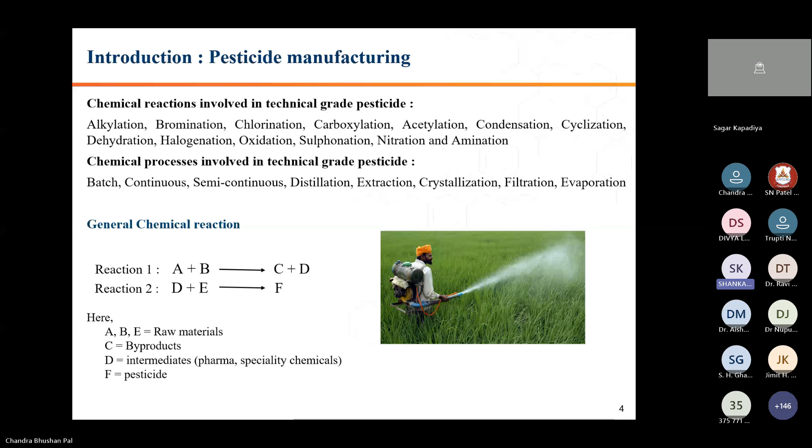Only there is a last reaction, which is the formation of pesticides - insecticide, herbicide, and all these things. The chemical processes involved are batch, continuous, and semi-continuous processes like distillation, extraction, crystallization, filtration, and evaporation. Same in the pesticide sector also. In general chemical reactions, you have already seen A plus B is equal to C plus D. In the pesticide sector, the last reaction is D plus E is equal to F, where F is the pesticide. Otherwise it's a normal reaction same as other chemical industries. Here C may be the byproduct, F is the pesticide, and D is an intermediate like in pharma, specialty chemicals, and all this.

Pesticide manufacturing - India is the fourth largest producer of agrochemicals after US, Japan, and China. Consumption of pesticide in India is 600 gram per hectare, while consumption of pesticide in other developed countries is 3,000, about 5 times more than Indian consumption.

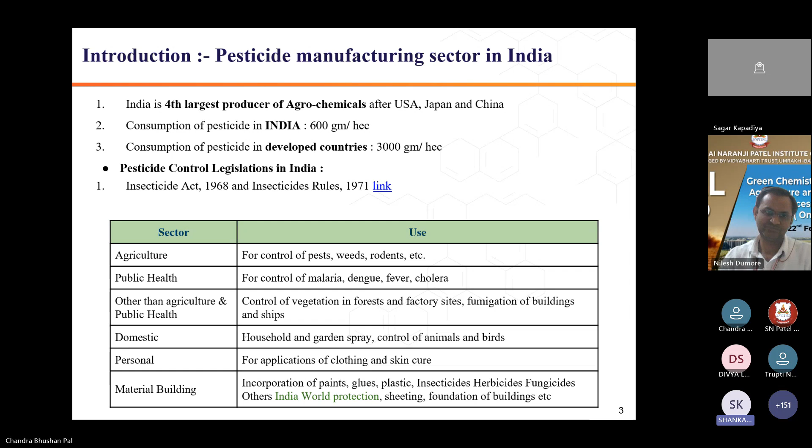The major act applicable to the pesticide sector is the Insecticide Act 1968 - we have given the link here also. Uses of pesticide are in agriculture, public health, and other than agriculture like wood preservation and storage, domestic, personal, and building construction also many times. So these are the uses of pesticides.

Type of pesticide is a very important part because depending on the type, the utilization is separated. If I see this, herbicide is a part of pesticide, but herbicide is different from insecticide. This kills the plants, either preventing or controlling them. Modern systemic herbicides are often used to control invasive plants, like grass, for destruction of grass and other invasive plant destruction.

Fungicide is a chemical compound that prevents or controls plant disease on contact. Fungicide forms a protective barrier on the outside of the plant to prevent disease from penetrating the tissues. Rodenticides are used to kill rodents. Insecticide is used to control or kill insects.

Carbamates are a group of insecticides that work by inhibiting the enzymes important for nervous system function, leading to paralysis and death of insects.

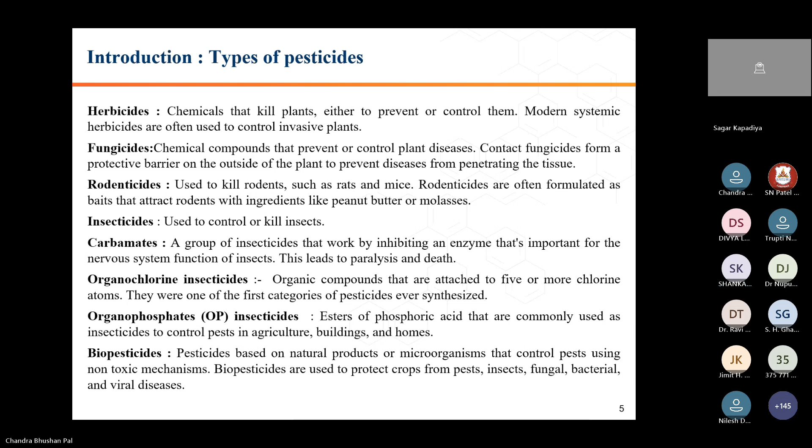Almost all chemical industries and sectors have similar water and wastewater management, maybe with slight differences. Otherwise, it's commonly needed across chemical industries. In the pesticide sector specifically, the only difference is that you have to destruct toxicity before sending to the effluent treatment plant.

Landfilling or incineration is the only additional criteria in the pesticide sector. Otherwise, the normal wastewater generation and treatment methodology is the same as in other sectors.

Water consumption in pesticide industries is mostly for cooling towers, boilers, and domestic processes, like other chemical industries. Water sources in Gujarat come from GIDC. If you're taking water from GIDC, then GIDC permission is required; if from borewell, then CGWA permissions are required.

Wastewater generated from processes—industrial means like cooling tower, boiler blow down, and sewage—cannot be used back into processes or discharged without treatment. This is the definition of wastewater. This wastewater gets treated in a dedicated wastewater treatment plant.

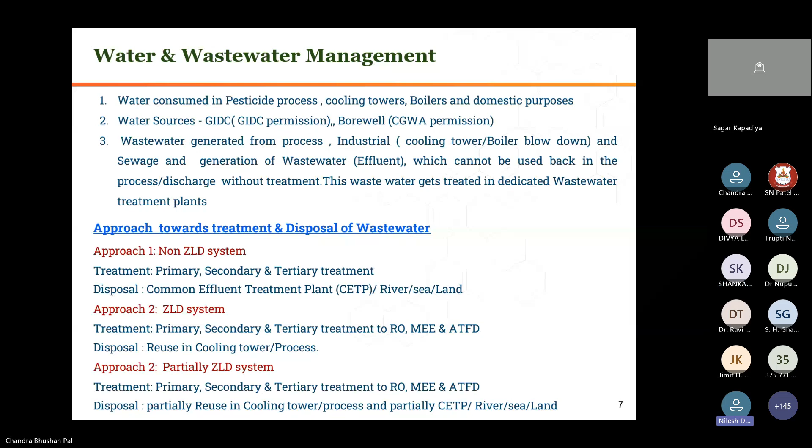So why is wastewater treatment important? Because if you don't treat your wastewater, there may be an impact on the environment as well as health.

To meet discharge norms of CETP, before discharging to CETP you need some treatment—only then can you achieve the CETP inlet norm. Similarly, deep sea discharge has a different norm, so to achieve those norms you have to treat your effluent.

Even for water recycling, you generally need some treatment—only then is it possible in a chemical industry to recycle your effluent back into processes as well as cooling towers.

Hence, before treatment, segregation is very, very important in a chemical industry. If you don't properly segregate, your effluent treatment plant will be disturbed, meaning not running properly, and a lot of issues will arise.

So always see in any chemical plant—even pesticide plants, pharma, all sectors—that segregation of effluent is a very, very basic requirement and a very important part.

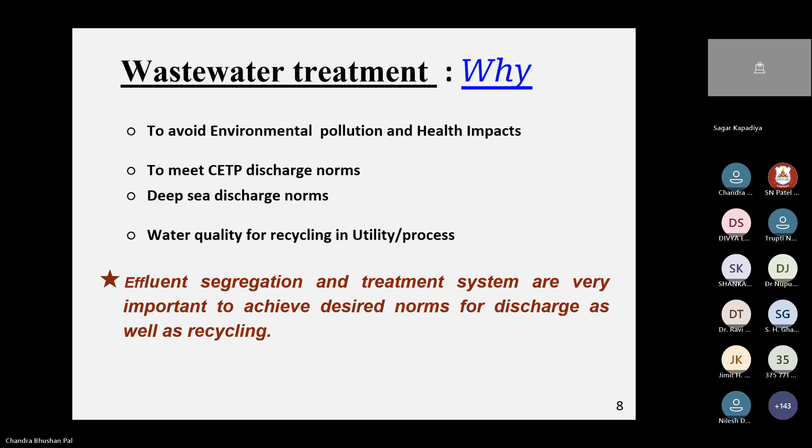Generally in a chemical industry, there is segregation like process effluent, industrial utility effluent coming from boilers and cooling towers, washing, cleaning and scrubbing, and domestic wastewater. This type of effluent segregation happens in chemical industries.

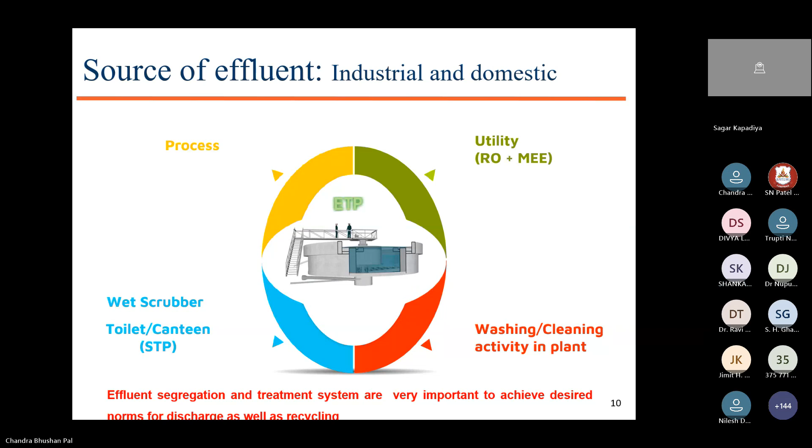By experience, I have given here how to segregate effluent in chemical industry. This is based on experience only - may not be written in some books, but by experience I have segregated effluent and we got good results for this. So if you see low COD and low TDS effluent - meaning below 5,000 COD and TDS below 10,000.

If BOD is more than 30%, you can take it directly into biological treatment. This is a thumb rule we have written here by experience. If BOD is less than 30% of COD, there may be slightly refractory COD there, so pre-treatment is needed like chlorination, ozonation, Fenton H2O2, followed by biological treatment.

Some effluent has nitrogen, like ammonical nitrogen, but low COD, low TDS effluent. Then pre-treatment is required for ammonia treatment because ammonia is toxic to biological treatment. You have to reduce ammonical nitrogen below 50 before biological treatment, then only will it run efficiently. Pre-treatment like H2O2, stripping, MAP system - all these are required to stabilize ammonia.

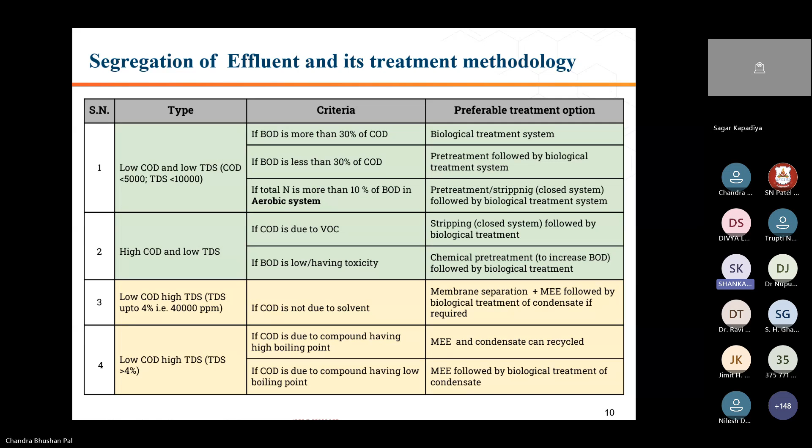Then high COD, high TDS: if COD is due to compound having low boiling point, stripper is required followed by MEE, or sometimes incineration, depending on the toxicity and other factors.

High COD, low TDS with high CV value: if CV is above 2500 and chloride is below 4%, then co-processing. Otherwise, that goes to incineration if toxicity is also there. Co-processing means sending your residue directly to cement industries, which utilize it as fuel, replacing coal.

Co-processing is a very good phenomenon, motivated by the Ministry of Environment and Forest, CPCB, as well as State Pollution Control Boards like GPCB. It's very important - your carbon footprint is reduced, fuel consumption is reduced, and it's very favorable for destroying your residue, because in combustion there are 3 T's that are very important: time, temperature, and turbulence. Let me compare incineration and cement industry.

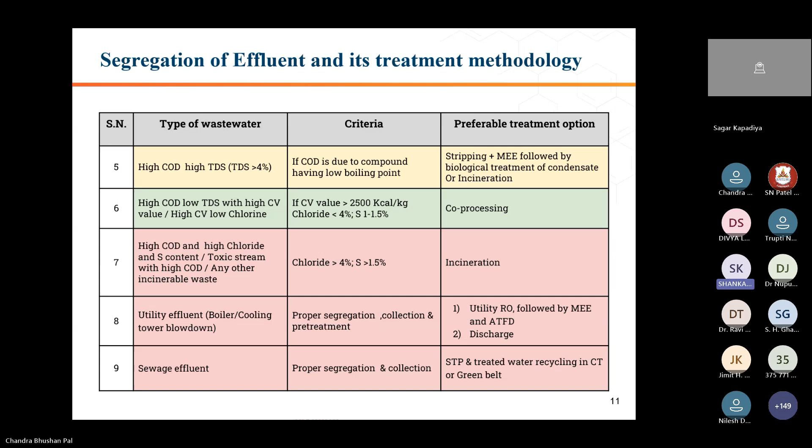Then if you have utility effluent like cooling tower blowdown, boiler blowdown, collect it and take it directly into the ETP, or some pre-treatment is required, and you can discharge it if there is marine or CETPs depending on your location. Sewage effluent you can take into the STP, and STP treated water you can utilize into green belt development or cooling tower after chlorination, because there is slightly bacterial content, so algae may generate if you don't chlorinate that compound.

So we see what is the effluent treatment plant. We have already segregated our water for biological treatment. Nothing is biological treatment, ETP plant depends on your quantity and quality of the effluent. You can select your type of ETP - activated sludge process, MBBR, MBR - depending on your trial run or treatability study. You can select your technology.

Correct. So here is primary treatment, biological secondary treatment, and tertiary treatment. If you see this preliminary treatment, this includes both physical unit operations and chemical unit operations. In preliminary treatment, you do physical separation as well as sometimes required chemicals like chlorination, ozonation, Fenton - all these chemicals are required.

In primary treatment, here also both physical as well as chemical, because you are removing SS by physical methodology by separation, and chemical reaction like coagulation and flocculation. Lime we are adding, there is a lot of acidity, so there is a chemical reaction happening here.

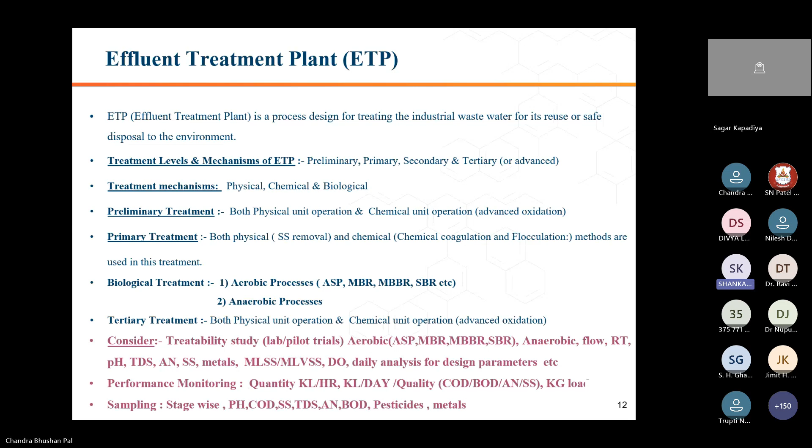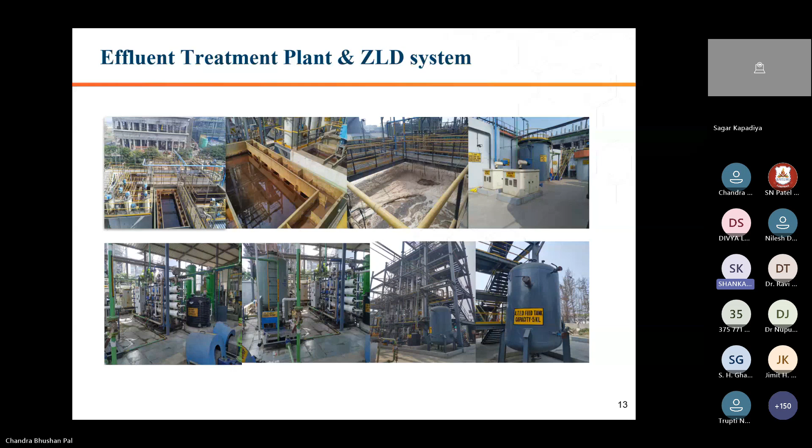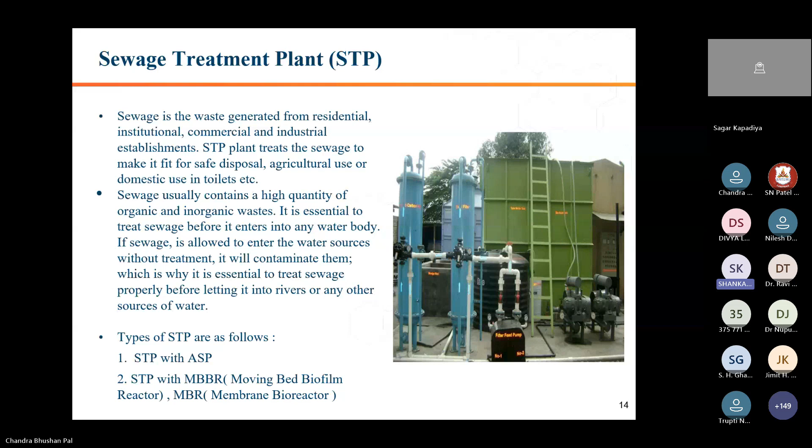So same operation phenomena for particularly STP - small, maybe 30% generation of your industrial effluent. Yeah, next.

So I have given here types of ETP and the treatment methodology and equipment. So if you see this, first is activated sludge process. Primary treatment is common for all types of ETP. Only biological treatment is slightly changing.

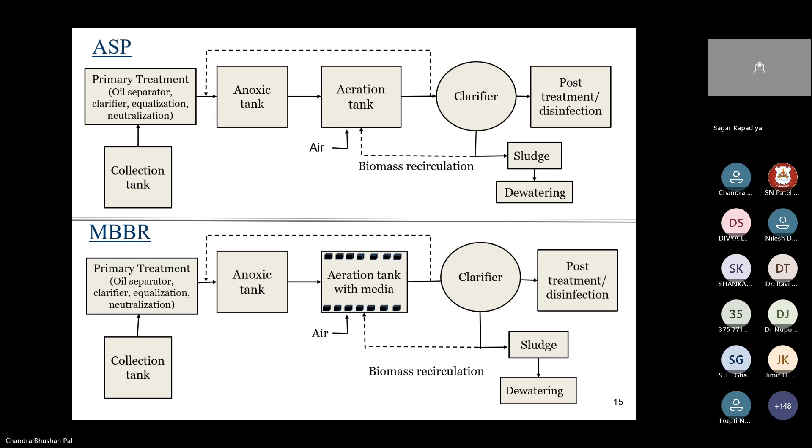Principle here is suspended solids is very less. In activated sludge process, after clarifier you are getting 80 to 100. Here at 20 to 30 you will get suspended solids, so clear water you are getting here.

One more benefit here: in normal activated sludge process, your biomass may be 3 to 4,000 milligram per liter. Here you can accumulate about 10,000 to 20,000. So that benefit also you are getting in MBR technology. Only slightly skilled member required to handle that MBR part. So otherwise this is a very good technology.

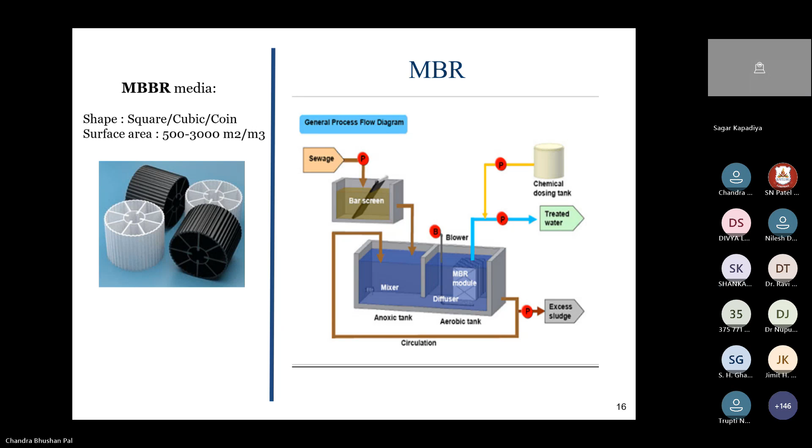So zero liquid discharge, many times you get question, what is really ZLD for a company? So near your total effluent generated, you should treat and recycle back into the process, into your cooling tower, as well as domestic water also you have to treat and recycle into your processes. Only generated sludge waste, landfilling waste, you have to send to the TSDF facility. That is called ZLD units.

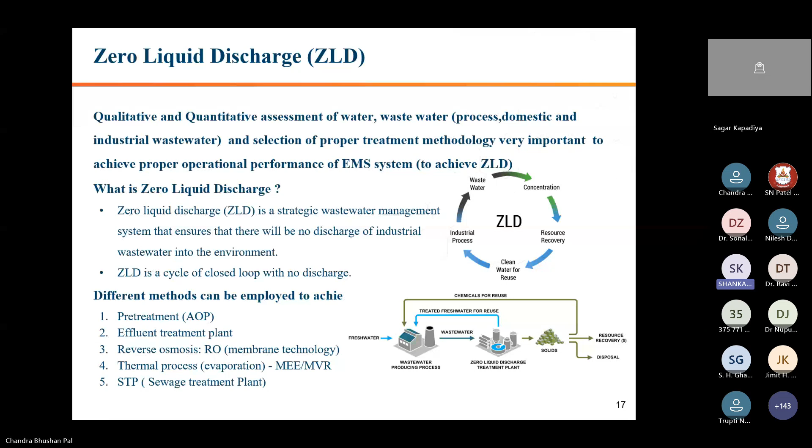Already discussed on the pre-treatment. After segregation of effluent, many effluents having high COD, high phenol, high ammonia, so many times pre-treatment is required before sending to the particular biological treatment, the ETP plant. So if you see these advanced technologies: photochemical oxidation, catalytic wet air oxidation, ozonation, electrochemical oxidation, and Fenton oxidation.

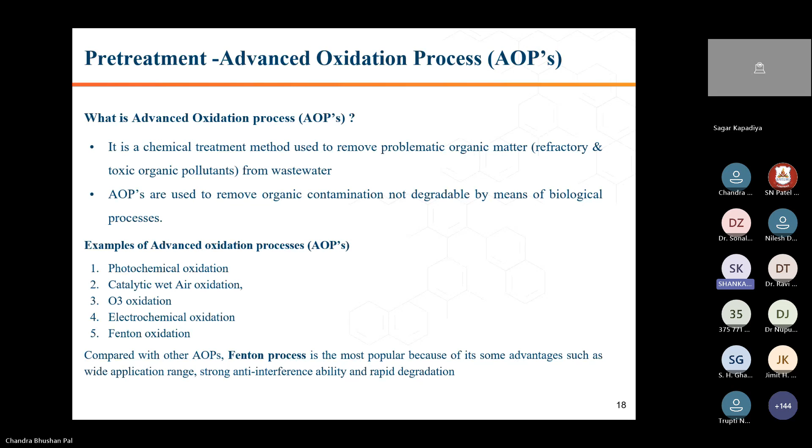Fenton process is the most popular because this is easily oxidized, a highly oxidizing agent, H2O2 and ferrous sulfate. Yeah, we'll see this in detail. Yeah, next sir.

So Fenton is nothing else, this is oxidation, and we are generating OH radicals there by using H2O2 and ferrous sulfate. This reaction happens

at 3 pH. So if your pH is above 7 like this, so you have to acidify and reach 3 pH. Then only this reaction happens along with ferrous sulfate. So this is research by Fenton scientists, that's why there is a Fenton name there.

Or requires a lot of chemicals. So this is costly in industrial area, maybe 4 rupees to 8 rupees cost per liter for Fenton treatment. If your COD is like 40,000, 50,000, and you want to bring it down to 5,000 followed by biological treatment, then maybe 6 to 7 rupees, or 4 rupees, depending on the slight characteristic of that particular compound.

So here also, if you want to establish your Fenton treatment, then lab trial and pilot trial is very, very important. This can happen in

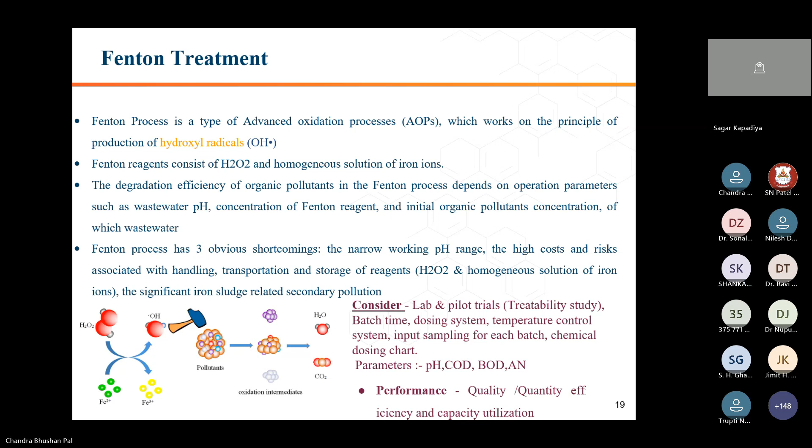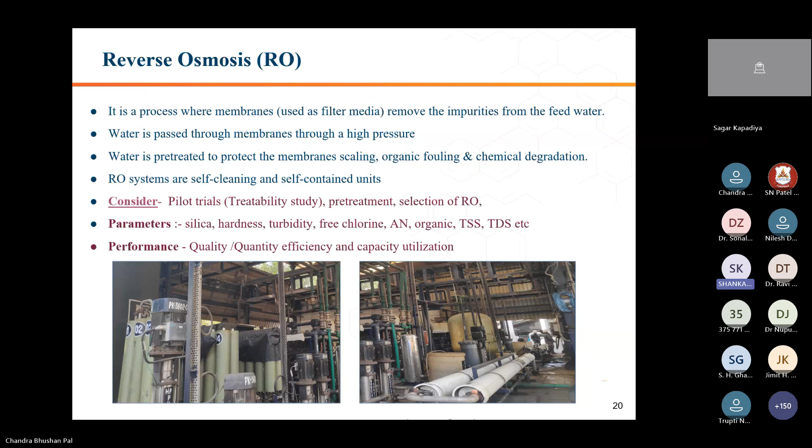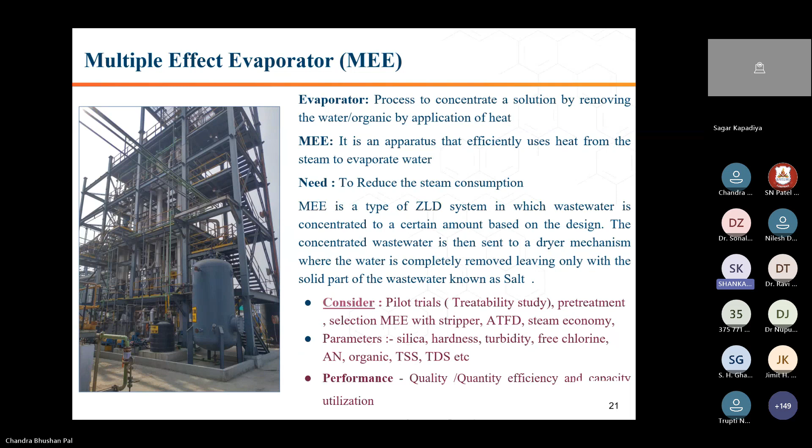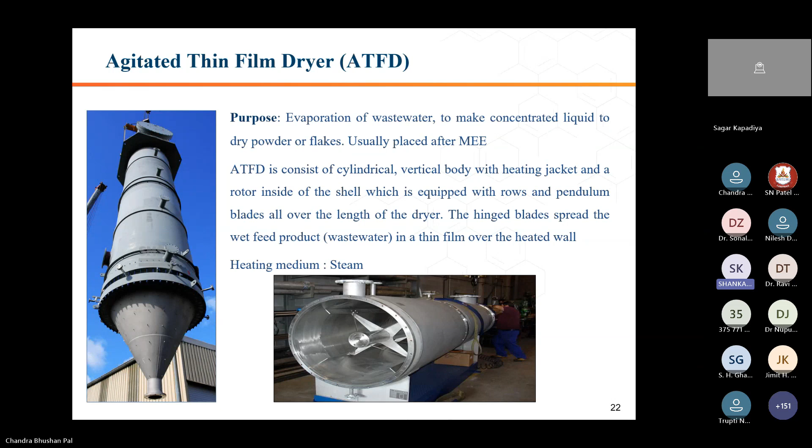Now air pollution control measures, the second part. The first part was water and effluent; second part is air pollution control measures for chemical industry as well as pesticide industry.

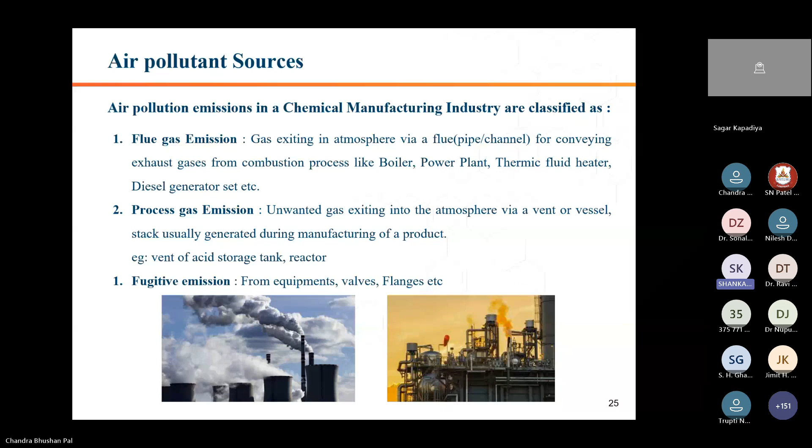Fugitive emissions are due to equipment leakages - flange, valve, some spillage, leakage, overflows. That fugitive emission happens from vents not connected to a particular scrubber. All these are fugitive emission sources.

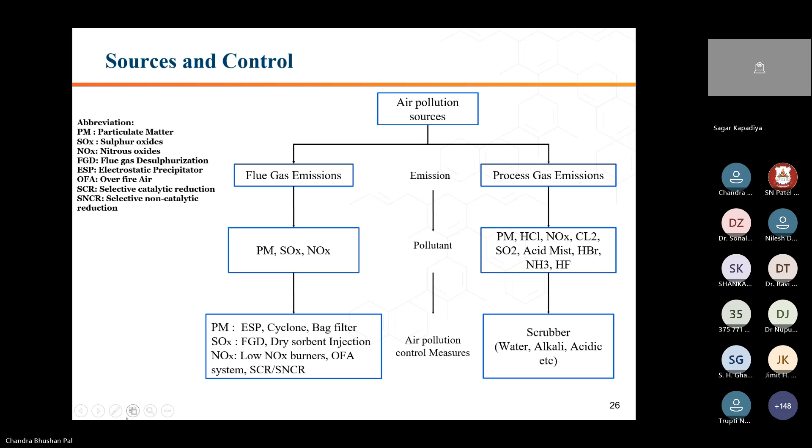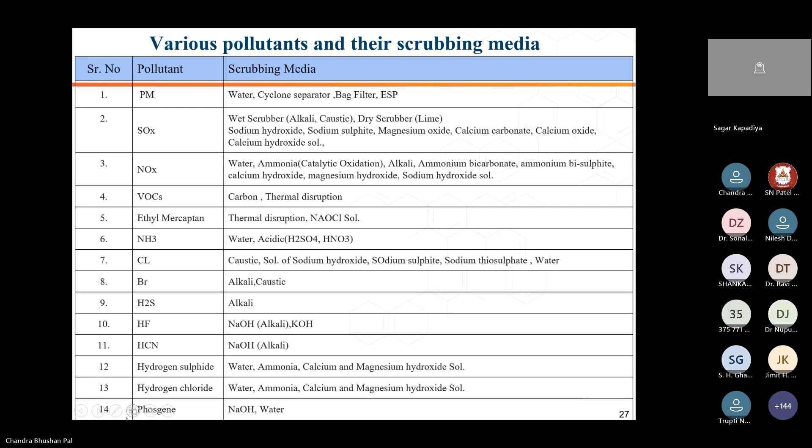Control of particulate matter: this is mostly in solid products as well as coal-based solid waste fuel, which particularly generates particulate matter. You need a cyclone separator, multiple cyclone separators, or bag filter. Or if you want results like 20, 30, 40 ppm, then you can utilize ESP.

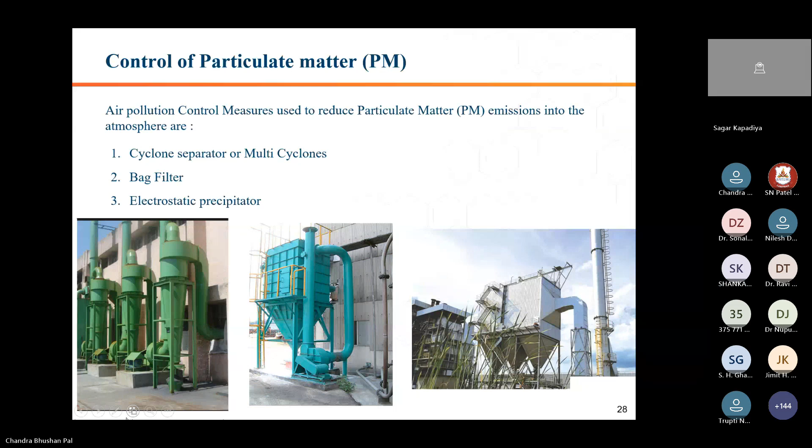Cyclone separator also controls PM due to centrifugal force and gravity; due to the center of gravity, your particulate matter goes down and separates in the cyclone separator. So this is also one particulate matter removal equipment.

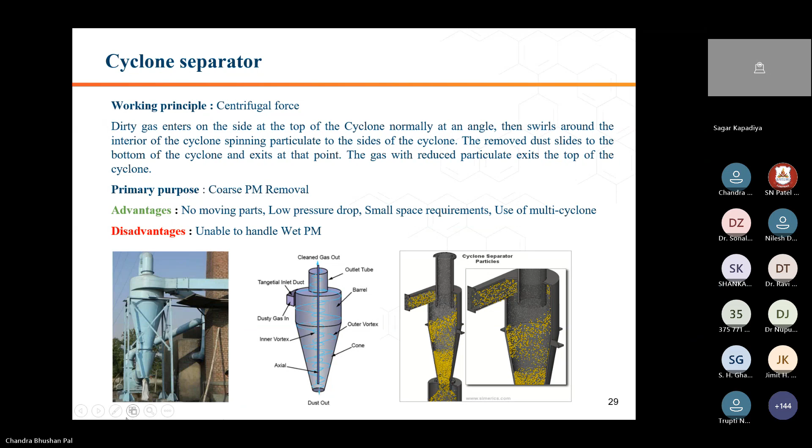Bag filter is also one of the equipment used to control PM. Compared to a cyclone separator, its efficiency is very high, though lower than ESP. This is also utilized in products as well as sometimes in incineration, and even in bag filters in your boilers and similar applications.

Here, vibrating air is very important, utilized to vibrate the bags and clean them internally. But again, you have to clean periodically, and preventive maintenance is also very important. Many times the bag burns or tears, so you have to always monitor the performance; inlet and outlet monitoring is very important here.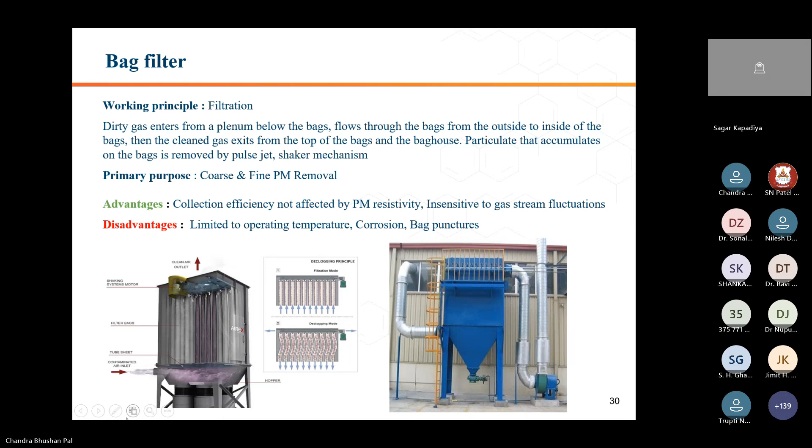ESP is a very good equipment, with slightly higher capital investment than cyclone and bag filter, but it also requires power particularly to generate ions. But results are very good; maybe 20, 30 ppm particulate matter we will achieve. So this is also utilized for products as well as in incineration plants and in boilers wherever there is solid fuel or solid inputs.

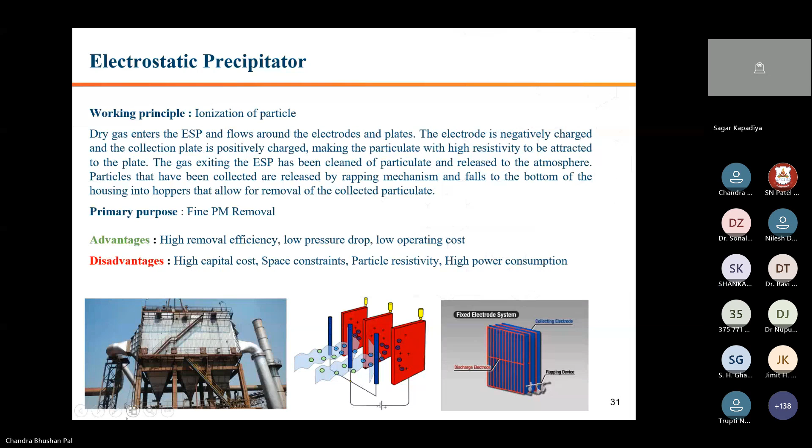In process, we already discussed this, the scrubber. Many times there is dry as well as wet. In wet, there is a packed type column, and depending on design, there is packaging material like intalox saddle packaging. There are different types: plate type, tray type, and venturi scrubber. In dry, sometimes carbon, sometimes lime, sometimes limestone are utilized in dry scrubbers to absorb the emissions generated from processes.

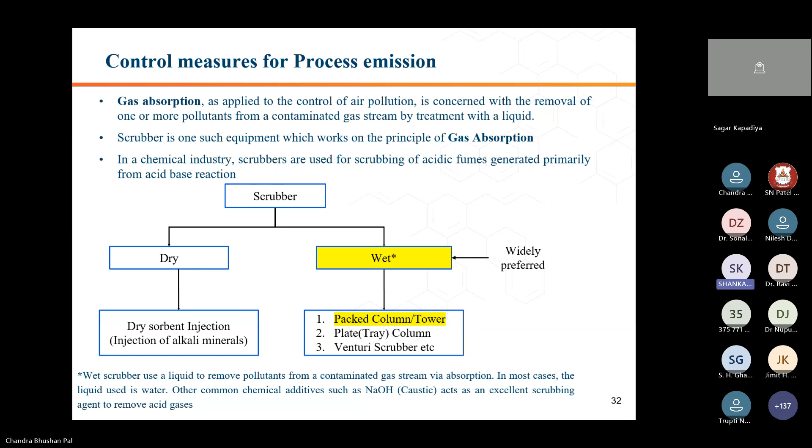This is a packed bed, which we already discussed. Here, the distribution phenomenon is very important. Many times choking happens inside the packaging, and then efficiency goes down. So cleaning is also very important. Scaling and deposition happen here depending on the input quality as well as the media. So proper cleaning and proper monitoring of scrubber efficiency is important here.

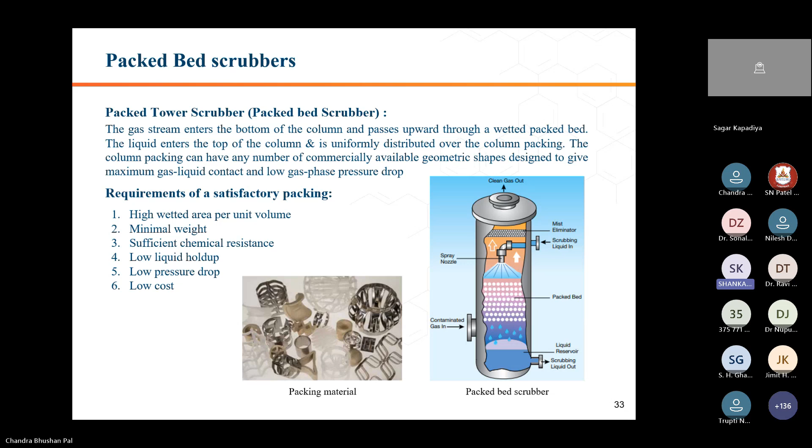For the Venturi scrubber, it depends on pressure and the benefit of the Venturi shape. Your mixing is very proper here between the inlet gases and the scrubbing media. That's why in compact situations, we utilize the Venturi scrubber in many places. Yeah, next.

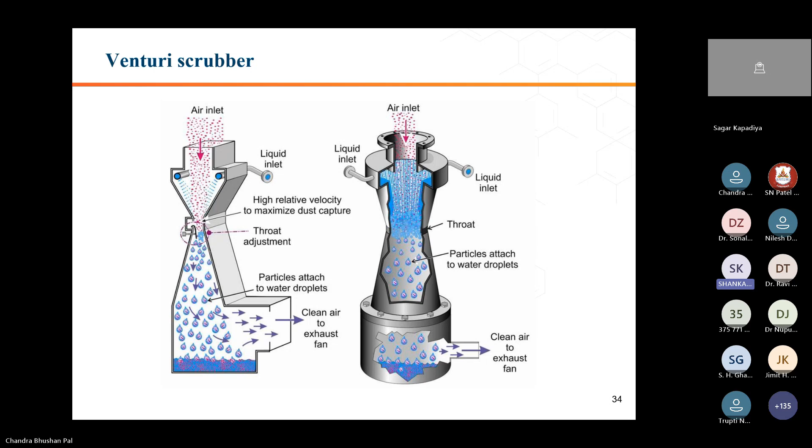So we have already discussed the techniques for VOC control as well as control mechanisms like particulate matter, particularly dry scrubbers. We already discussed the above, and this is a summary for that.

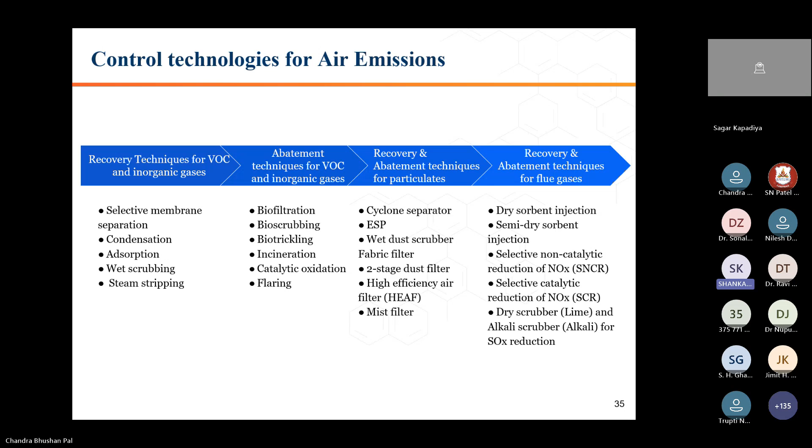If you see this sector-wise norms, go through the CPCB Green Book and you'll get sector-wise norms. They have decided norms for almost all sectors. I have taken pesticide sector norms here as well as comparison with other sectors. If you have HCl, other sectors also have the same value, 20.

PM with pesticide compound is 20 in the pesticide sector, like the solid products going out. So PM is 20, and other sectors range from 150 to 800. For example, pharma and dyes specialty is 150, and cement industry is 800. Methyl chloride generated in pesticide sector is 20; other sectors depend on generation. HBr here is 5; other sectors again depend on generation.

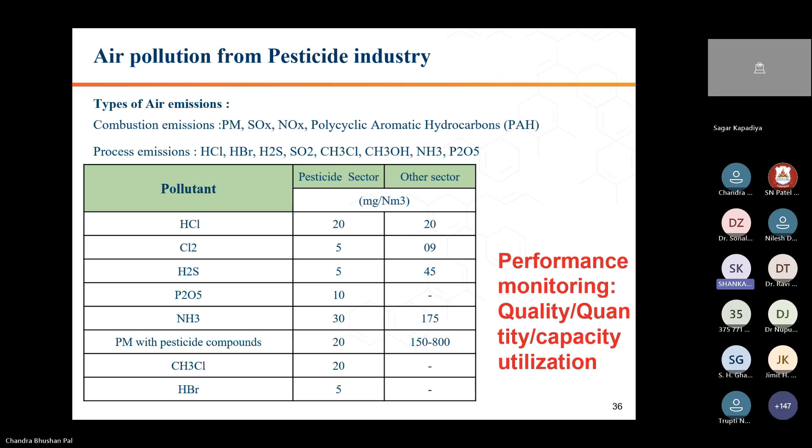Right now there is a requirement. If you see the 2018 guideline and GPCB 2014 guideline for solid fuel, depending on the guideline you have to install particularly OCEMS, online continuous emission monitoring system. This is a continuous real-time monitoring system connected to the State Pollution Control Board website as well as the Central Pollution Control Board website, and they monitor on a continuous basis with automation.

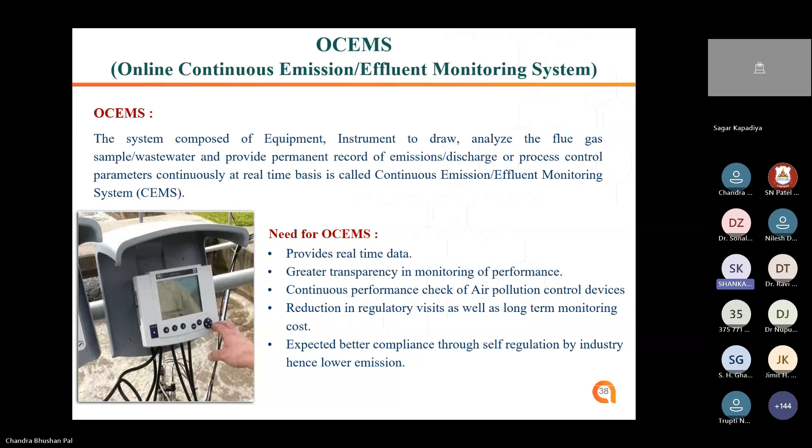So we'll see the fourth part, which is very important: water, effluent and air. Similarly, hazardous waste management is also very important in the chemical industry.

Hazardous waste is dangerous, potentially harmful to health or environment, because it's concentrated with a lot of product impurities, generated during the purification stage. Some part of the products, some part of raw material, some part of solvents come into that, which is why it's very dangerous compared to effluent. It may cause increased mortality and severe illnesses due to dumping of hazardous waste in unnecessary locations. So collection, storage, treatment, and disposal are very important parts.

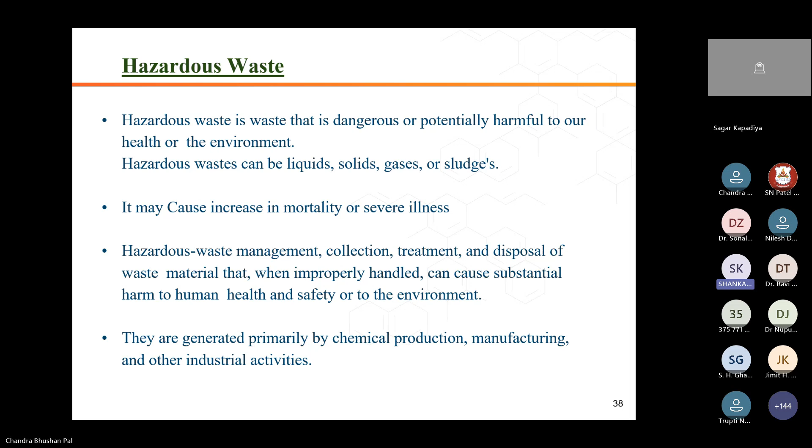You can make a lot of improvements in hazardous waste management through this pyramid. The most preferable option is to avoid and reduce the waste, which happens during processing of your manufacturing products. If conversion is not happening properly, your R&D process team and technology team need to work on how to convert raw material into product by 100%, through some mechanism like batch-to-continuous process or catalytic introduction.

This is very important to reduce waste generation and increase productivity through yield improvement. Reuse the waste if generated, reusing it in some other place or the same process - that is recycling waste. This is also important when you generate some byproduct, some solvent - how to recycle that is also important. Then recovery: if you generate 100 kg in a process, is it possible to recover some from that, or can it be converted into energy? Co-processing is a good example of energy recovery.

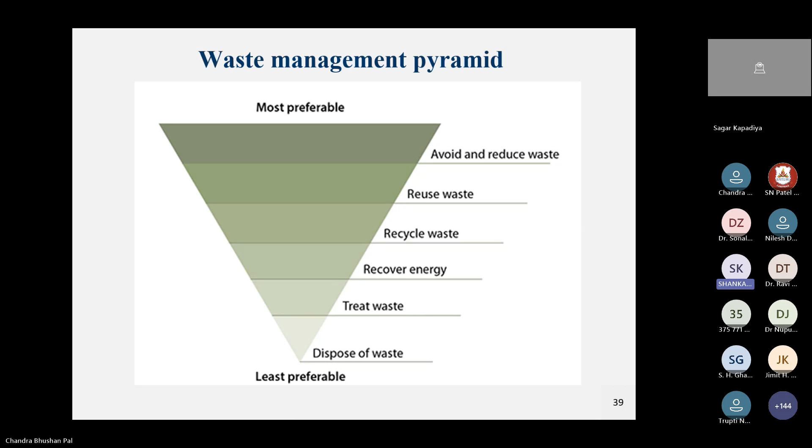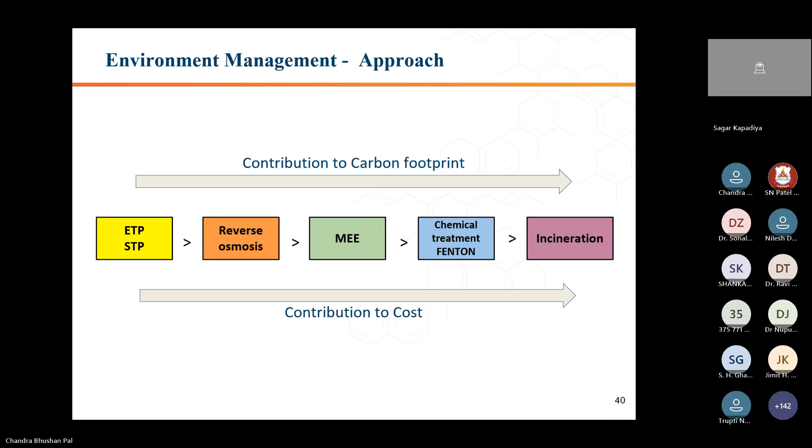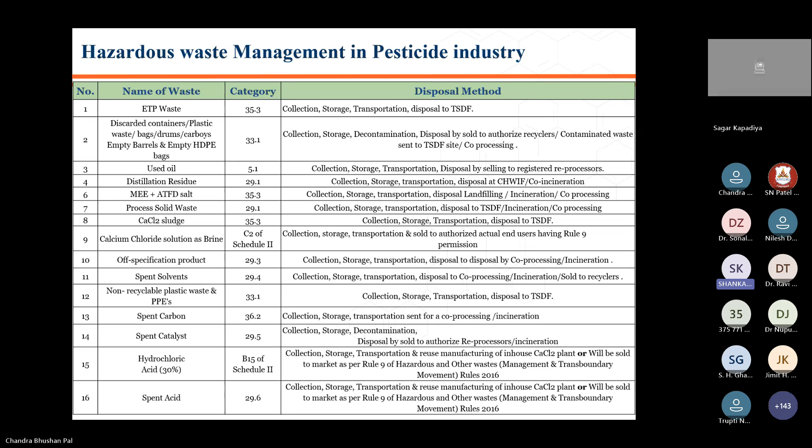Other categories are common for pesticide as well as other chemical industries. And there is a disposal methodology, category-wise, that is also defined. So here, based on experience, we have written it down.

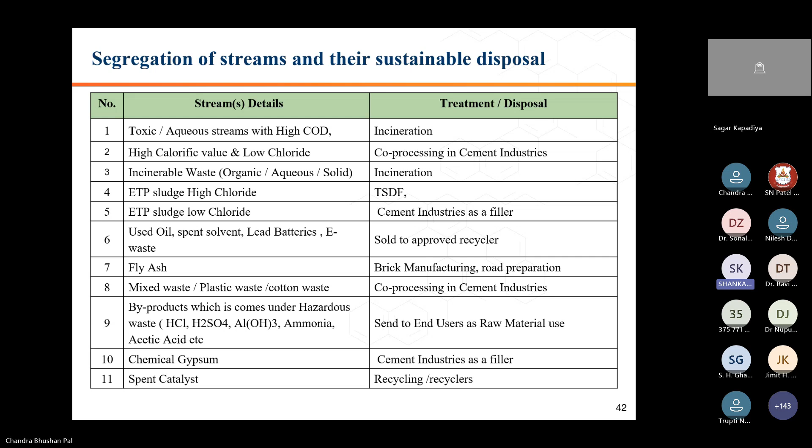Environment is a common area, and whenever there is a common area or common place and you want improvement, a lot of pressure and gathering of people is required. That's why environment is a common concern to all countries, and resolving these issues requires international agreement.

These international agreements happen depending on the issue at hand, like when ozone depletion was found in Antarctica - then the Vienna Convention of 1985 was published for protection of the ozone layer. Its implementation came through the Montreal Protocol of 1987, which identified six ozone depleting compounds and set up a control mechanism for when those compounds should be phased out.

Kyoto Protocol 2005 dealt with the issue of climate change, evaluating greenhouse gases like CO2, CH4, N2O, HFCs, PFCs, and SF6, and discussing how to control them in the atmosphere.

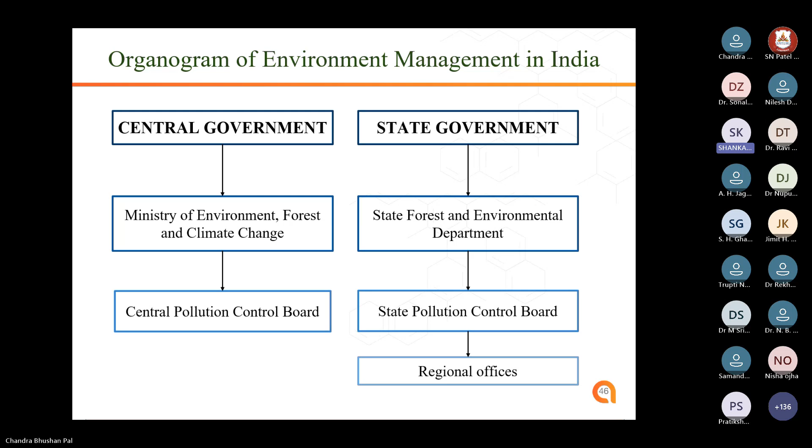So I have taken here the major environmental acts and rules in India. In 1972, there was one international meeting. At that time, Indira Gandhi attended that meeting, and there was discussion on how to control pollution in each country. So the first act was published in 1974, the Water Act. Then after that, the 1981 Air Act. But in between, in 1984, one incident happened in Bhopal.

There was no sufficient control mechanism legally because that incident happened in the process part. Their ETP parameter was very well within the limit. Process stacks also very well. Ambient air also very much within the limit. So how to punish that company was the question.

So in 1986 it was published. Right now this act is called the Umbrella Act. If anything happens from gate to other boundary, they can punish under this. Many rules come under this, maybe 30 to 35 rules, like hazardous waste rule, biomedical waste rule, e-waste rule, debris rule, noise notification, and many other things - they can be punished under this act.

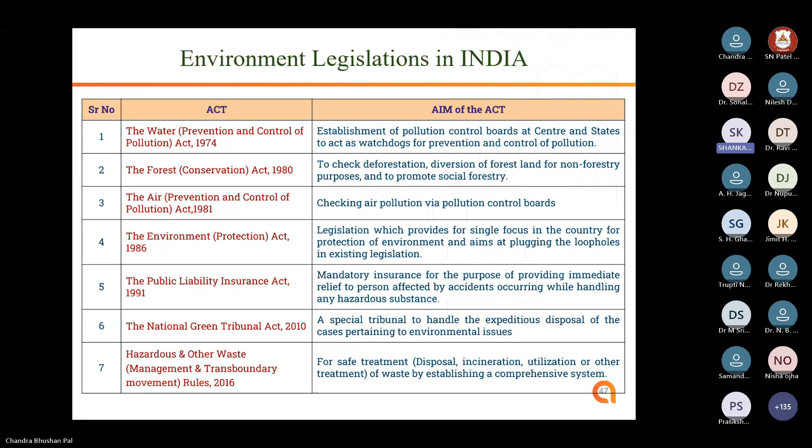So already we have discussed here - all this list is there under the 1986 act. If you see these major rules we have published, only in the pesticide sector is there a need for the Insecticide Act 1968. If you go to the CIB website, Central Insecticide Board, a lot of information is available related to pesticide. Otherwise, all these acts you will get on the MOEF site as well as CPCB site or GPCB site - all environmental related. Only insecticide is a separate requirement for the pesticide sector.

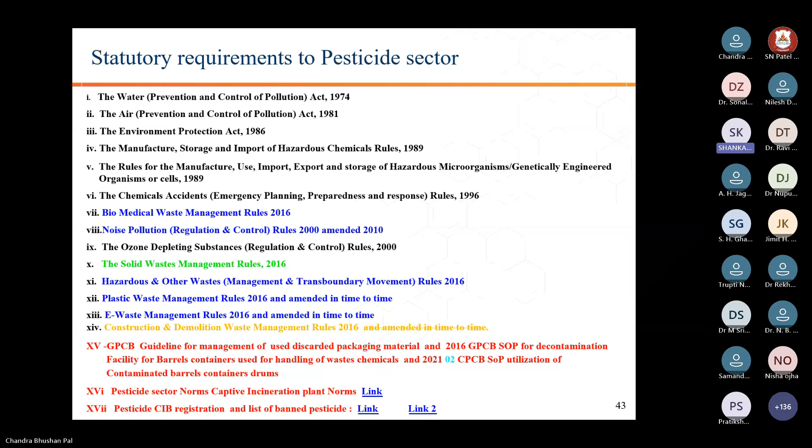So in any chemical industry or pesticide industry, monitoring is required like effluent, inlet, outlet, stage wise, soil monitoring, hazardous waste monitoring. Some require monthly partaks, annual hazardous waste return Form 4, environmental statement Form 5. All these things are a requirement to run the chemical industry.

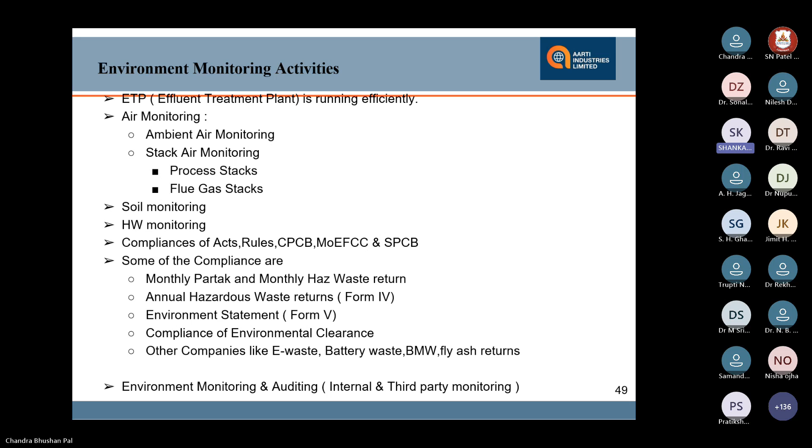Many new requirements given by state pollution control board or central pollution control board, like display board required - display the information on the website. Sector-wise norms we already have seen. Water harvesting system required, green belt development 30% inside, or sometimes they are allowing online monitoring system, OCEMS also required.

Byproduct sales under hazardous waste, rule number 9 SOP is required. Job work outside required lot of permissions and all these things. FETP - there is other requirement from the FETP, CETP as well as association. Your association also has some requirement.

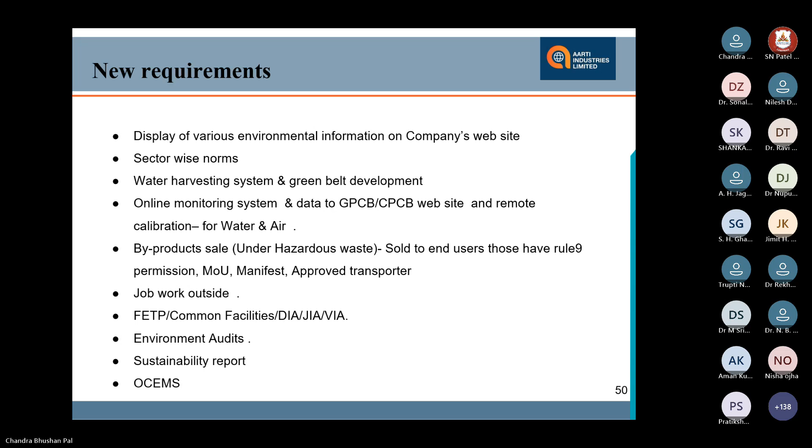In Gujarat, environmental audit also required. In Maharashtra also, last 3 months back there is a requirement of this and OCEMS.

This is also one new requirement - ISO 14001, responsible care, MoEF, GPCB, CPCB online regular updating. They are updating many rules and regulations. GPCB asking sometimes SAP data, stormwater drain, pH meter, CCTV camera, odor control - that is requirement.

Storage area for RM, FG and all these things separate. ZLD required, but sometimes solvent recovery above 95%. LDAR required - leak detection and repair system. GPS system for hazardous waste vehicles, CCTV, camera at gate, CER activity, always proper records and inventory.

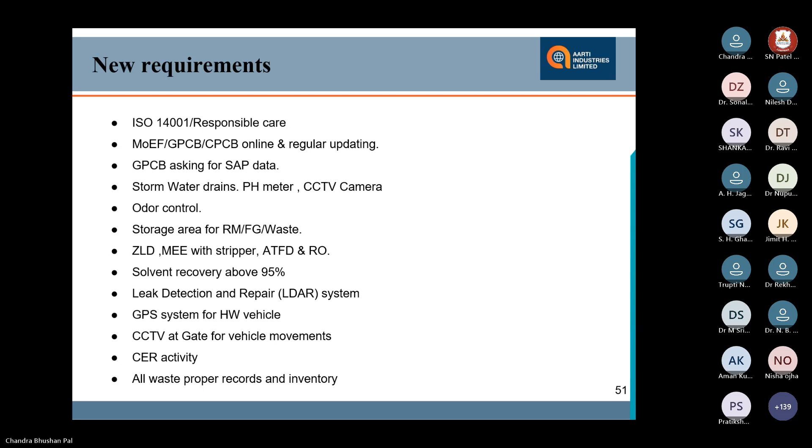This is a requirement for chemical industry, so this is a mandatory requirement for your records. ETP log sheet required - any environmental management systems equipment required log sheets. Hourly basis you have to monitor.

Hazardous waste generation and disposal, Form number 3, production water consumption effluent generation data always needed. Green belt development area, air monitoring records also required. Scrubber records, coal records - all these things records also very important, particularly record internally, and they are verifying also.

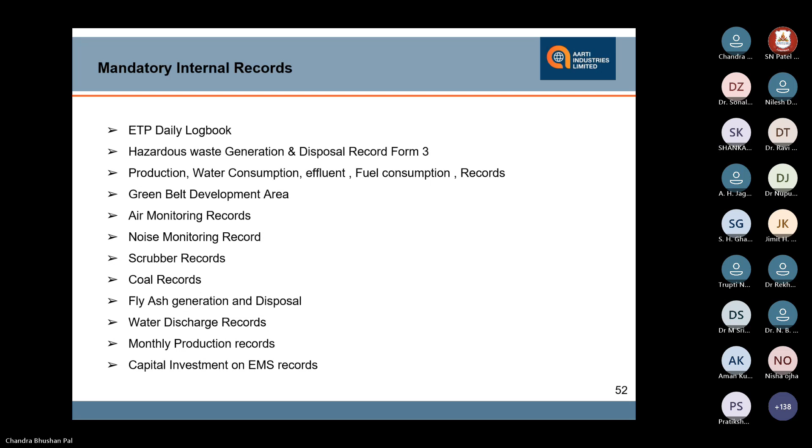EIA is also a very important part for environmental clearance. I will not take much time because, as per 2006 notification, there are two categories - one is A category and B category. A is more for big industries and more environmental impact industries like petrochemical, cement, and pesticides. That comes under A category.

B category is slightly less, so they are segregated into categories. Expert appraisal committee takes care of A category, and state appraisal committee takes care of B category. There is screening, scoping, and all these things, public consultation - that is the sequence. Then preparation of final EIA depends on your TOR conditions, and appraisal presentation is required, and then they give the environmental clearance. That is the procedure for EC notification 2006, amended time to time.

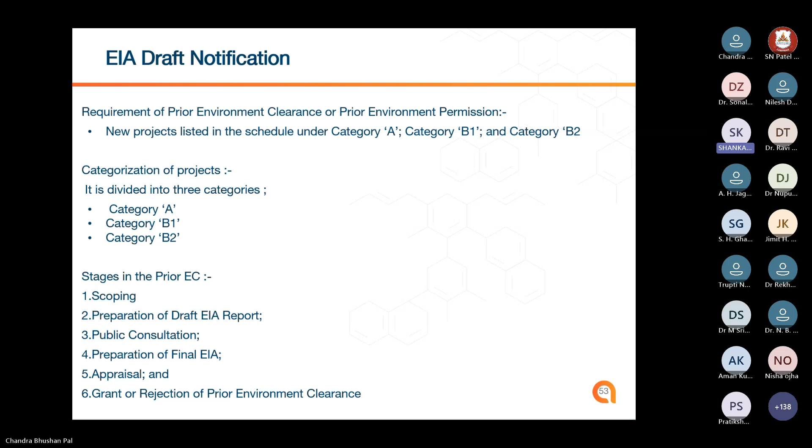This is a procedure, same procedure, with required standard time given by Ministry of Environment and Forest. Sometimes they take much more time because there is ADS and EDS generation, additional detail required. On that basis, it slightly takes more time.

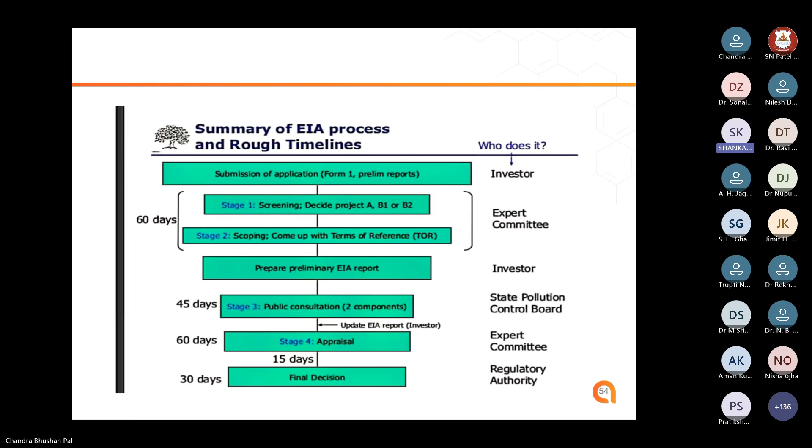Can this video run? There is one small video, 1 minute video, if possible. Otherwise okay - yes, yes, possible.

Maybe slightly difficult to run, but this small video will get a good message. Okay, thank you.